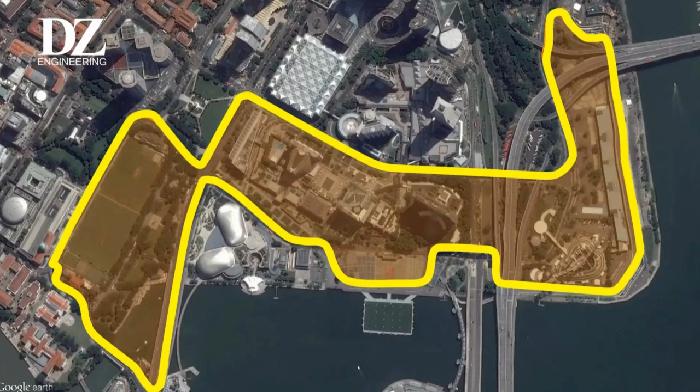To give you an idea of the magnitude of this project, this is the circuit layout of Singapore, and these are some numbers related to it, which we gave to the media the first year. As you can see, we have more than 1,500 floodlights on 7,000 meters of aluminium truss, supported by almost 250 pylons. On top of it, 280 kilometers between cable and fiber optic, 47 cameras, and so on.

So this is a solution that we developed, and as I say, it is still unique because it's still the only one that integrates everything in the same infrastructure.

But let's start from the beginning, starting with Formula One. What is Formula One? I presume everyone connected knows about Formula One. There is nothing to be ashamed about if you don't know it. When I arrived in Singapore in 2007, most of the people did not know what Formula One was.

Actually, I can say that in the last 5 years, thanks also to some products on Netflix, it became very popular and increased in popularity. But if you want to dig more, there is a link from the Formula One website related to what Formula One is. It's a 5 minute video, quite interesting. I will explain in detail.

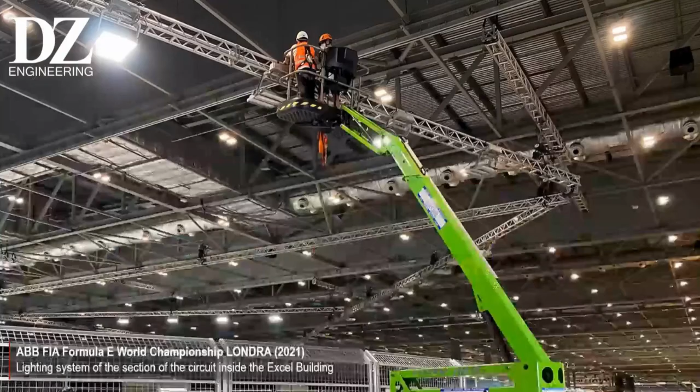Let me jump for a quick while into a different championship, Formula E, another one-seat car competition. After the first ever Formula One night race, we lit up also the first ever Formula E night race in Riyadh, in Diriyah, in 2021. The same year, also the London E-Prix, which is an indoor track layout, so we had to light it up exactly as a night race. Last but not least, last year we lit up Las Vegas with a unique solution that will be better explained by Cristian later.

I think one of our key points was developing a solution that was not blocking at all the activities of Las Vegas. Whoever of you is from Las Vegas, or has been there, knows well that it's a city that never sleeps, and the activities of the city need to be carried on all the time. That was, I presume, one of the keys of our success.

And so night races became very popular. Everyone presumed that a guideline would come out, which is exactly what happened.

In 2010, the FIA, Federation Internationale de l'Automobile, came out with the motor racing circuit floodlights for competition vehicles without headlights document. We helped them draft the first document, and in following years, in 2019, we were in Birmingham as a partner to develop also the second release, which came out in March 2020.

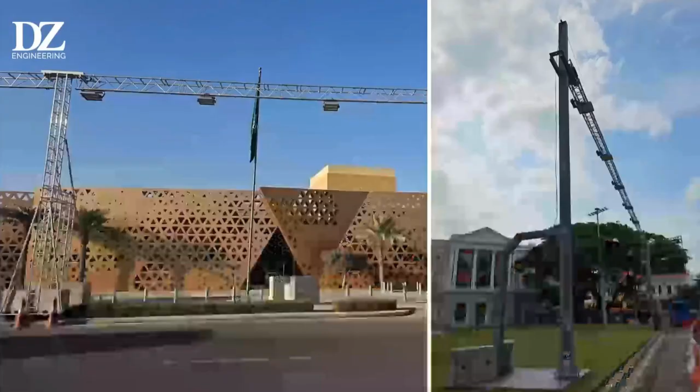In general, our system is made up of 4 elements. A steel metal plate as a foundation element with precast concrete ballast to ensure stability. A pylon made by aluminum truss or a steel mast that is reinforced with a rear element called chair. A bracket on top or a cantilever where the span can be fixed. A span made by squared, rectangular, or foldable truss that can be tensioned depending on the type of the pylon.

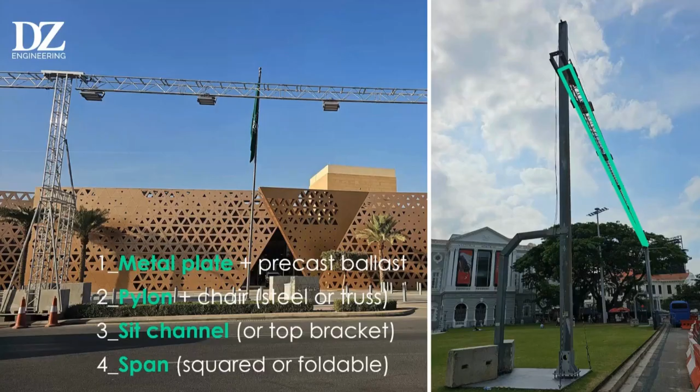When we approach the preliminary design of this type of system, the questions we typically have to ask are essentially four. Is the site survey strictly needed? Generally speaking, we can say that the examination of the problems present on the construction site, especially relating to the placement of the metal plates, is certainly desirable.

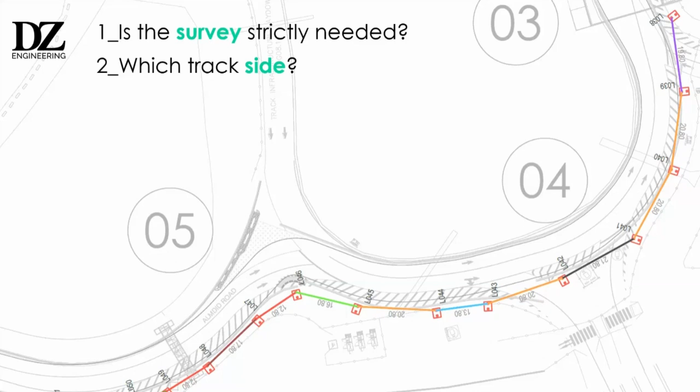Which is the best track side where we have to install our system? It is the side more comfortable for good lighting levels, much better if it is on the same side as the broadcasting camera. In some situations, a double side is strictly necessary, for example when we have a runoff area to light up.

Which is the floodlight height to consider? Indicatively, the installation height of the projectors, and therefore of the truss system, is between 8 and 10 meters.

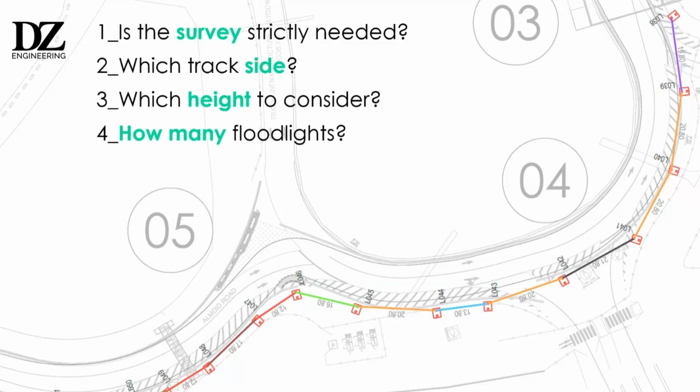Last, how many floodlights can be used for each span? Of course it depends on the type of span and obviously on the width of the track. In general, we can assume an average distance between projectors varying around 4 and 5 meters, in order to follow the FIA guidelines.

This document considers the power supply and structural elements required to physically carry the light, as well as lighting levels and verification procedures that are part of the lighting system. In general, the primary aim is to provide a guide for the design, approval, and verification of lighting systems that meet the performance criteria to deliver a quality of illumination of the motor racing circuit necessary for drivers, officials, and marshals to perform their tasks in a safe environment.

The second aim is to provide a specific guide to deliver the required level and quality of illumination for high-quality television broadcast. We are talking about horizontal and vertical illumination levels, but also about uniformity and diversity levels.

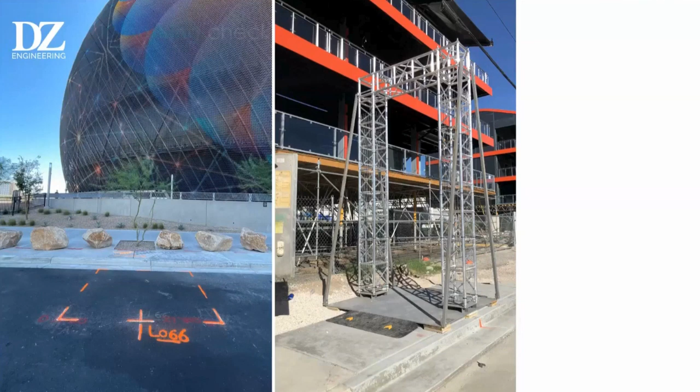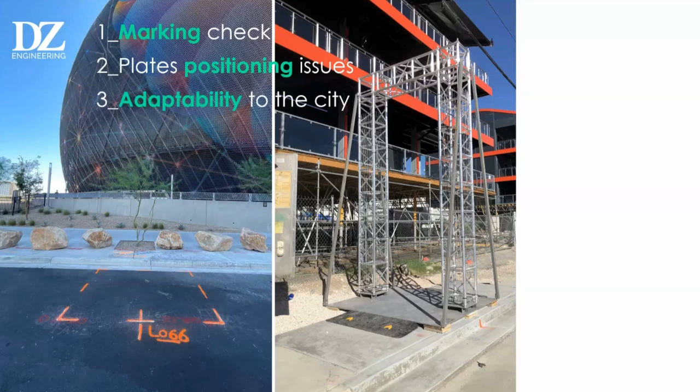In terms of operation, the infrastructure activities start from a marking check, better if it follows a topographic survey. Second, an evaluation of all issues related to the positioning of the metal plate, for example manholes, flower beds, pedestrian footpaths, etc. So we have to follow a real adaptability to the context, to the city, and also provide a safe system even during the installation activities.

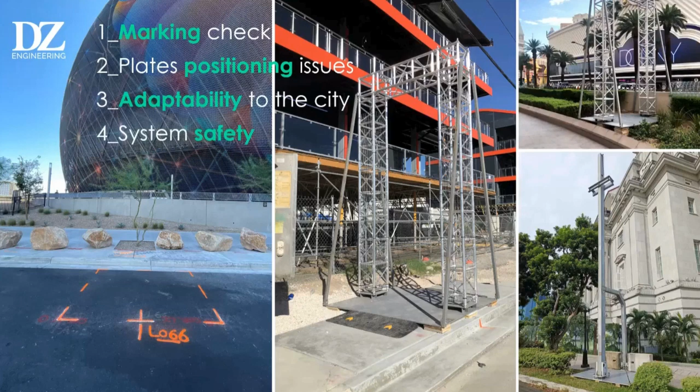After the pylon installation, the truss span is lifted with the help of a mobile crane and two boom lifts that fix it to the pylon brackets.

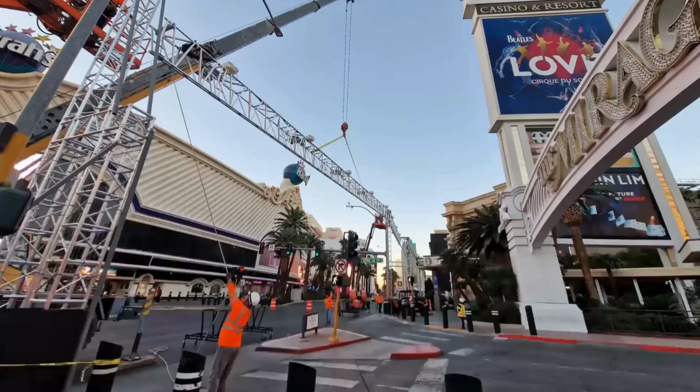So what we can say is that the activity strictly connected to the span lifting depends on the span length, obviously. It depends on the hanging system, on the installation schedule, but most importantly, it depends on floodlight positioning and aiming.

In this picture on the right, we can see how we have solved the LED driver location in order to achieve a proper tilt and pan of each floodlight without any clashes toward the truss structure.

FIA guidelines give us some important feedback about the electrical distribution. One of them, probably from my point of view the most important, is the redundancy system. The lighting system must be designed so that the loss of any section of dual supply cable or power supply point will not cause the illumination on the section of track served by it to be affected by more than 50% in terms of average illumination levels.

Furthermore, the system must include a fail-safe backup lighting capable of immediately delivering not less than 50% of the normal illuminance on the track for 30 minutes if the main system fails catastrophically.

What does it mean? In general, in our system, along the circuit there are areas named PGU, Power Generator Unit areas, roughly between 12 and 16, where in each area there are located 2 generators in parallel with a simple main electrical panel that is named MEP.

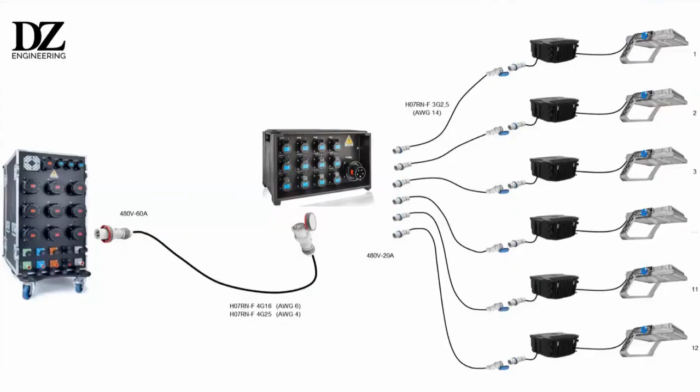From each MEP, there are several circuits, several primary cables that give power to the secondary panel named the TCP, in the middle of the slide. TCP means truss control panel. Every TCP connects 12 floodlights.

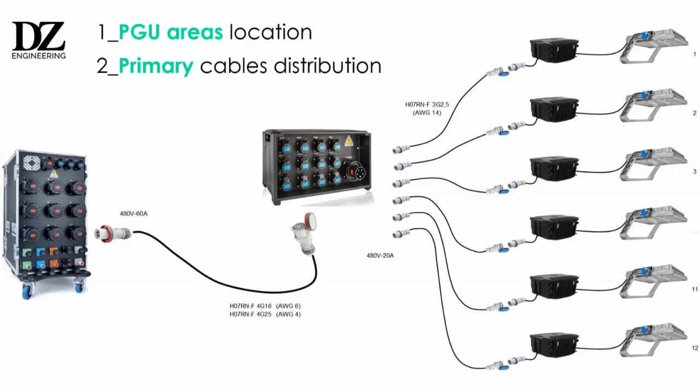All the primary and secondary cables are installed on the truss in order to avoid any risk. And it will be necessary from the beginning of the design to optimize the number and the location of the PGU area, to check the best solution in terms of primary cable distribution, lengths, voltage drop, whatever is needed for a proper design. And we have to solve the overlapping system in terms of what the FIA guideline is asking us in terms of redundancy system and backup system.

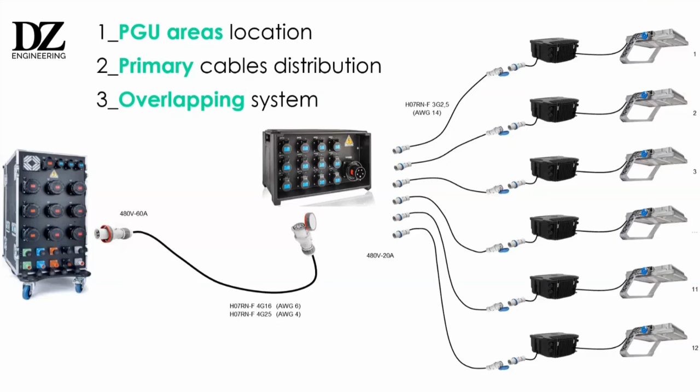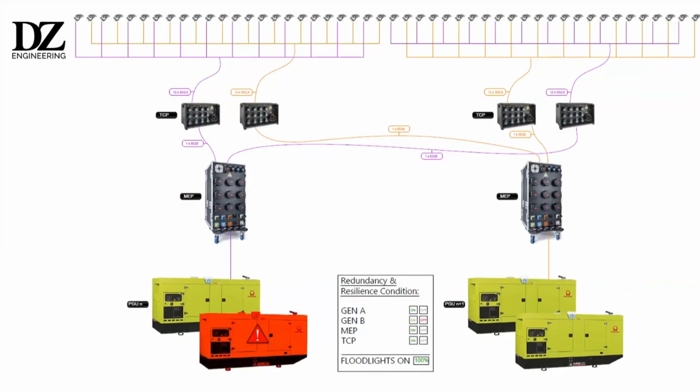This is a simple example of what we have done in Las Vegas. In general, the system overlaps to have 50% of the fixtures always on along a stretch potentially affected by a fault. If there is a fault of one generator, nothing happens because the generators are in parallel. If there is a catastrophic failure and both generators are off, thanks to the overlap, at least 50% of the floodlights, you can see it on top of the slide, in the portion of the circuit served by that PGU area will remain on, thanks to the power coming from the nearest PGU area.

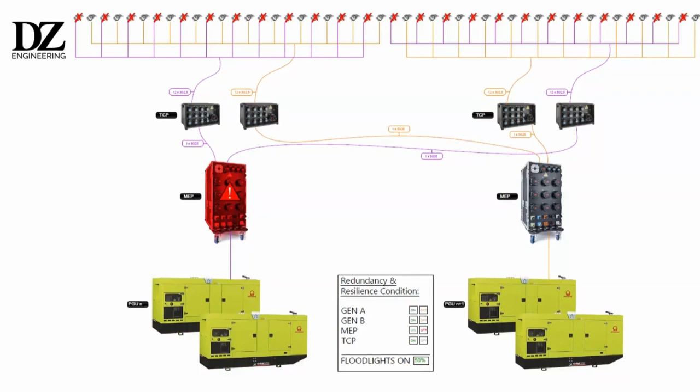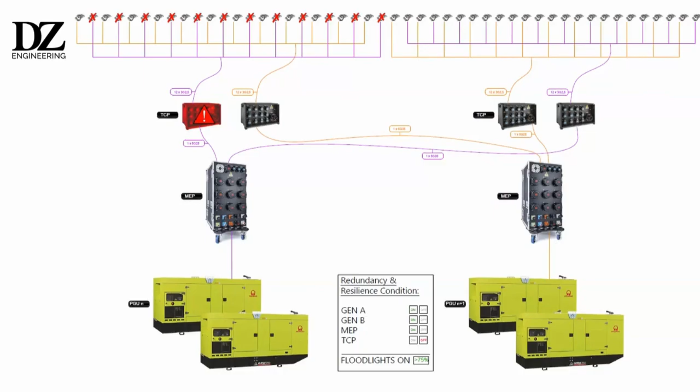Again, same situation in case of catastrophic failure that involves the main electrical panel. It can happen. 50% of the fixtures will remain on; remember, FIA guidelines require at least 50%. In case of fault on the TCP or a functionality problem of a single circuit, no more than 12 floodlights will remain off, but never consecutively, thanks to the redundant electrical distribution. In any case, or where strictly required by the customer, there will be a control room where it is possible to control all the operating parameters of the lighting installation and all integrated systems such as CCTV or public address.

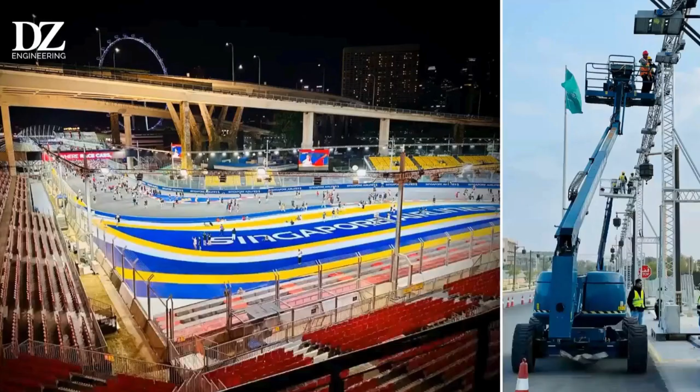So actually, our goals in terms of lighting effects are, first of all, maximize the horizontal uniformity. It seems easy, but it's not easy. This aspect is strictly related to the optic choice. For example, as shown in this picture, it could be needed to use symmetric optics, you can see some of them on the right side of the slide, for large areas to cover. Also, the camera plan needs to be considered in order to evaluate a proper vertical level towards the camera position. Last, the spill light effect should be controlled to achieve the best aiming. At the end of the day, it's important also to check what the broadcast manager is able to see.

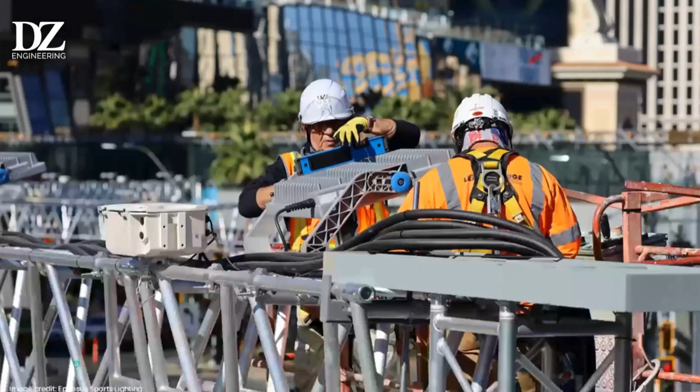Everything can be solved starting from the lighting calculation. Tilt and pan, that means the rotation of the projector on the horizontal and vertical planes, allow the optimization of the levels. The LED optics are truly high performance, but require maximum accuracy and precision. This is the reason why the digital level is our best friend even during the day. Following this procedure, we are really able to control 100% of the emission, covering only where strictly needed. In this picture, we can see how the light is really where we need it, even if Las Vegas is not a good example in terms of surroundings. But again, we have achieved the best spill light control, because, for example, the palm trees on the left are not lit up by the fixtures.

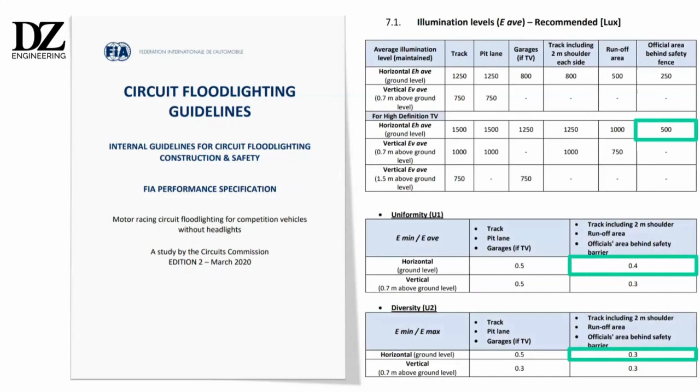Anyway, in my opinion, the secret is not to fight spill light, because sometimes we need it. This is the case of the illumination level needed for the officials area behind the safety barriers. We are talking about 500 lux with a uniformity of 0.4 and diversity of 0.3. Indeed, a good tilt can give us a good result with the right control of the spill light also behind the truss system. This is the real power of the Ephesus LED lens, and probably it is the future of the power optimization of street circuit lighting. So we are always focused on these topics.

Reduce the installation height, that means reduce the flux. Use asymmetric optics as much as possible to direct the light only where it is strictly needed, avoiding any kind of light pollution or glare for the people on the stands, for the people on the streets, for the drivers, for the officials. Reduce the total power consumption thanks to the optic choice and the control of the diffused light, which really can become our best ally. Don't forget that. Currently, for example, in Singapore and in Las Vegas, we are using 1,600 fixtures with an energy saving of roughly 35% compared to the metal halide technology.